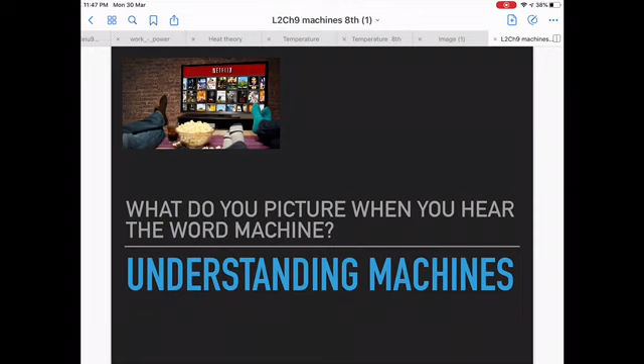I hope you're not going crazy by now. Remember that we're almost done for this part of the week, and then we'll start with our vacation mode. That will be super cool. You can watch documentaries on Netflix, stay with your family, play board games, chat with your friends, and a lot of stuff you can do. I know some of you really want to leave, but don't forget, stay at home and stay tuned.

Okay guys, I'm really joking a little bit with my class because I want you to smile. I want you to enjoy this time that you'll be watching my video, and I hope if you have doubts, just let me know. I'm really missing you, and I hope you are missing me too, a little bit at least.

I'll continue. So remember before we were talking about work and power and how all machines came from that. Now we said that in order to have work done, we need distance to be involved, okay? So this is what I want to start with.

Now we will start talking about understanding machines. I won't ask you what do you picture when you hear the word machine, because I know no one will answer since we're not online. So let's go to the next slide.

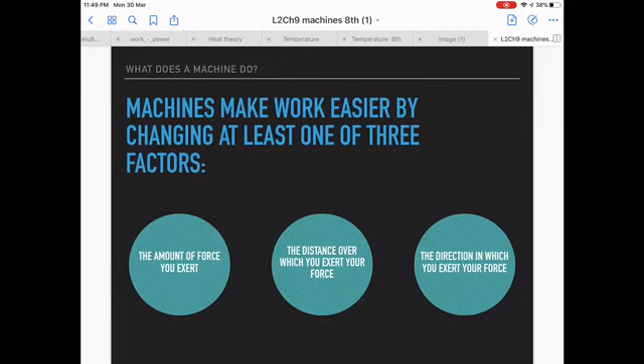I don't want you to be fooled with all of this information. You do not need to learn anything by heart, because right now I want you to have the theory about simple machines, understand them, understand some concepts, and then when we come back after vacation, we'll start with the problems, okay? Let's have it clear that machines help us do work in an easier way.

They can help us through three different factors: the amount of force you will exert, which will be less; the distance over which you exert your force, we'll see some examples later; and the direction in which you exert your force. If you apply your force pulling, the object will be pushed, or the other way around.

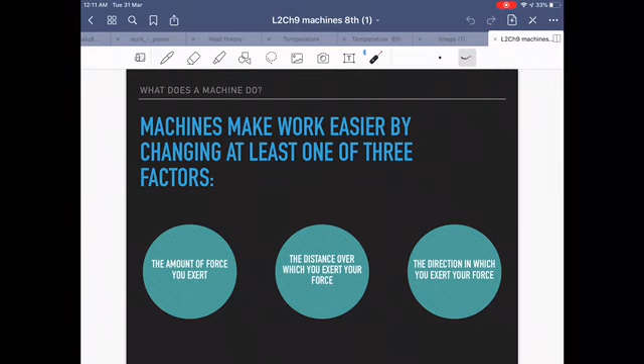Now we have two concepts here called input and output force. You already did these key terms before, and these two words are important. In order for a machine to work, simple machine or compound machine, it needs a force to be applied on it, so work can be done.

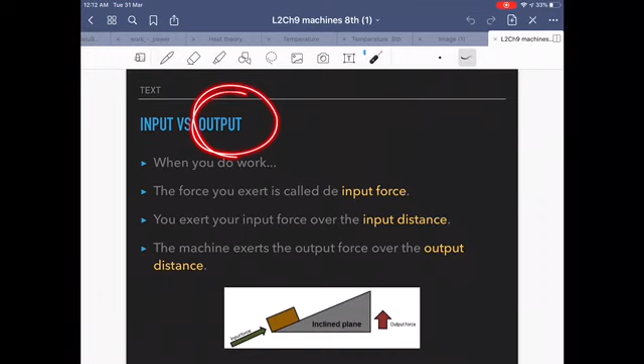The input force, for example, will be the force that is applied into the machine, the one that you as a person or another machine will insert or apply to the simple machine. And the output has to do with the outcome force: what it makes it like, the distance covered at the end, or the force covered at the end, etc.

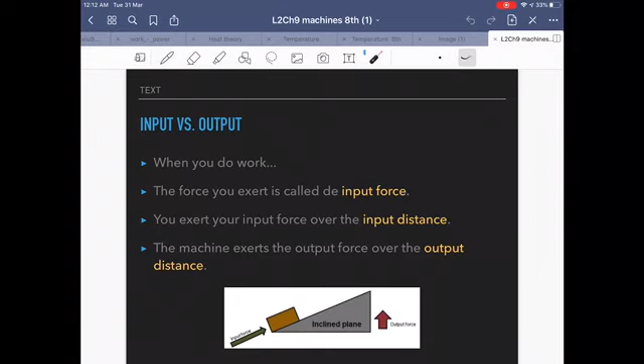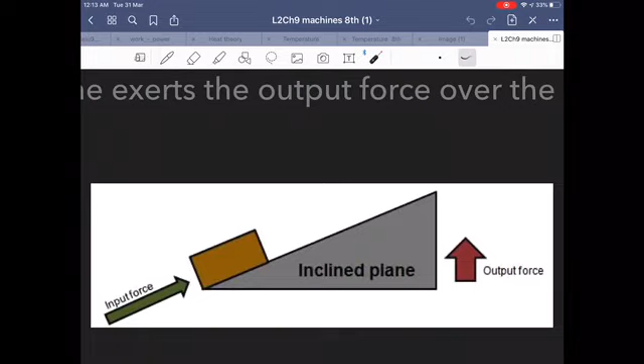Here I have a short example where you have an inclined plane. You already know more or less what an inclined plane is, if not we'll see it right now. The input force is applied right here, and the output force will be up here. That's more or less to understand this concept. As I said, you don't need to have it super clear, but understand it a little bit.

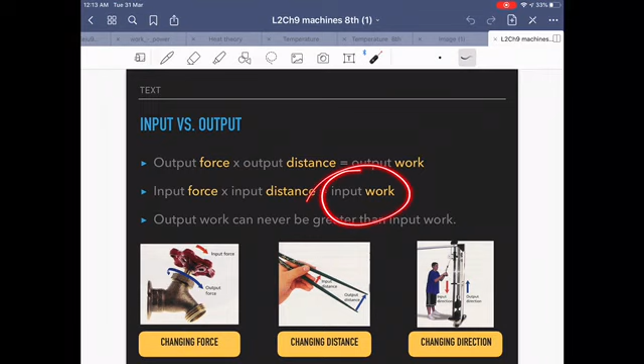We also have the input work and output work, and just as we know that work equals force times distance, right here the same applies. The output work equals the output distance times the output force, and the input work equals input force times input distance. Stuff that's kind of obvious.

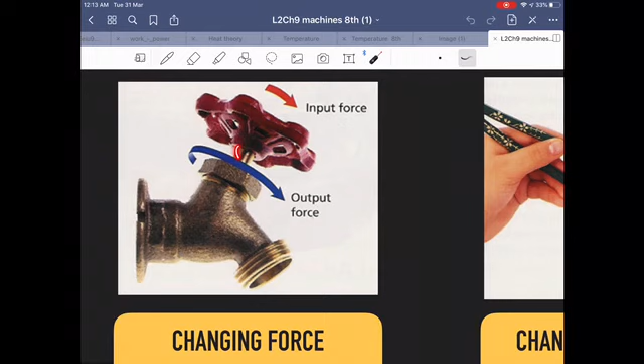Now the three factors I was talking about before, for example changing the force in this one: this small pivot right here, if you would use your two fingers to move it, it would be super hard. That's why they have this thing here to make it turn and make the force increase. This is the example of the first factor.

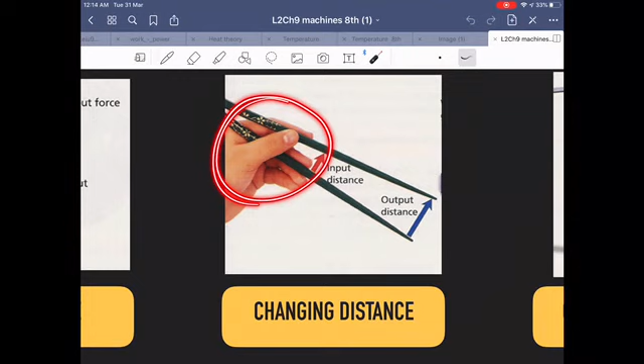The other factor would be the chopsticks and changing the distance. For example, in this part right here you're applying the force, and this part right here you're taking, in this case, the sushi, or the rice.

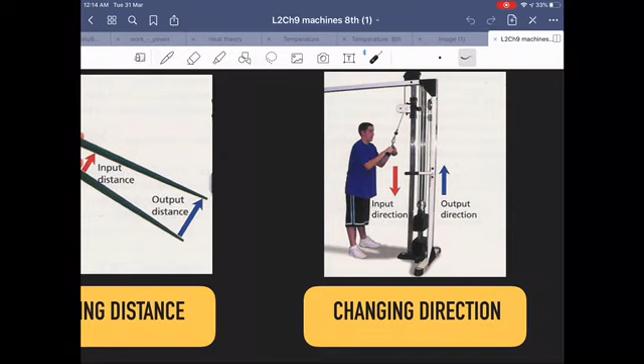Now let's move to what mechanical advantage is.

This is a very important concept that we need to know. Mechanical advantage is the number of times a simple machine helps you to do work in an easier way. Each simple machine will have its own formula, but I won't talk about that right now. It's the ratio, or the number of times, as I said.

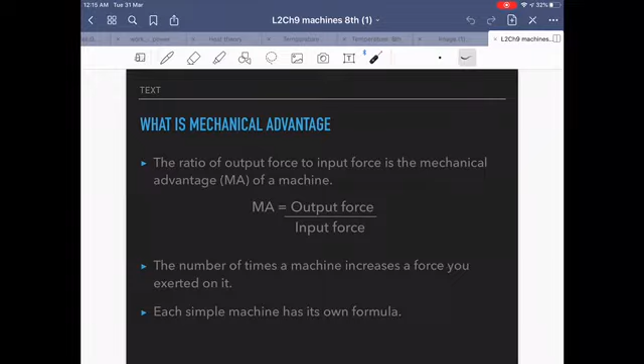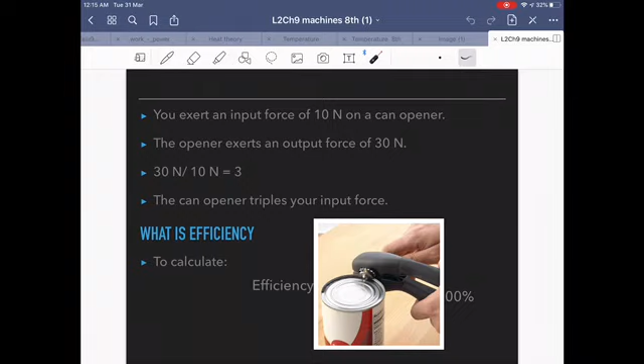I'll give you a short example. You exert an input force of 10 newtons to a can opener, and the opener exerts an output force of 30 newtons. Can you imagine applying a small amount of force, and the outcome is a bigger force? So you have 30 newtons as output, and 10 newtons that you applied.

So this is helping you 3 times. The mechanical advantage is helping you 3 times. It's like having 3 of you, like 1 Miss Pamela, 2 Miss Pamelas, 3 Miss Pamelas moving it with that force.

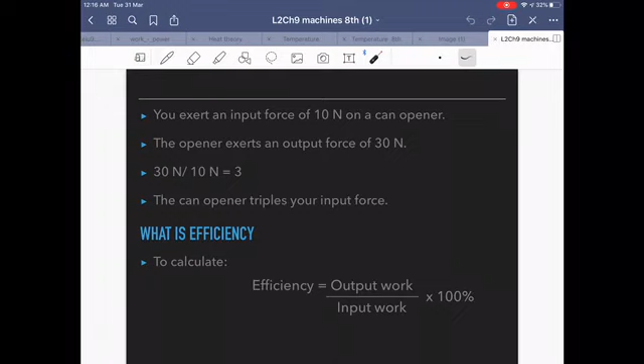And efficiency is dividing the output work by the input work and multiplying it times 100. We won't do problems of efficiency right now. That's for machines, and the most basic devices for making work easier are called simple machines.

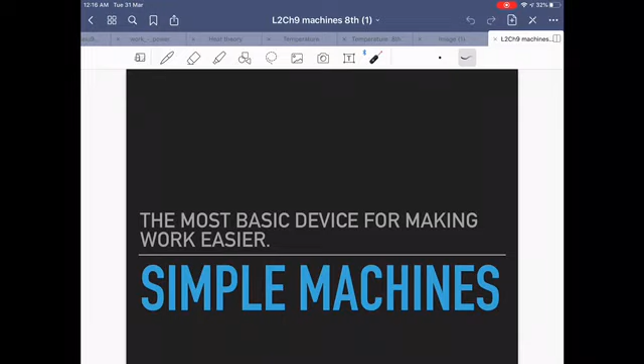By now you have heard the simple machines rap, right? I hope you liked it. It's kind of sticky, that song. I loved it, and I hope you remember it sometime. Sorry, my microphone fell.

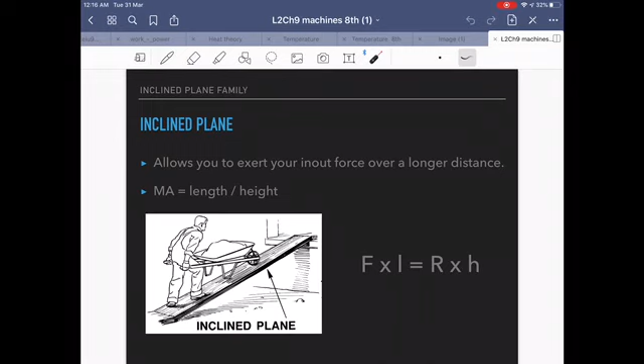Now let's start with the inclined plane. The inclined plane helps you move over a longer distance depending on how inclined it is. Please stop this video and watch the inclined plane video in the instructions of this classwork.

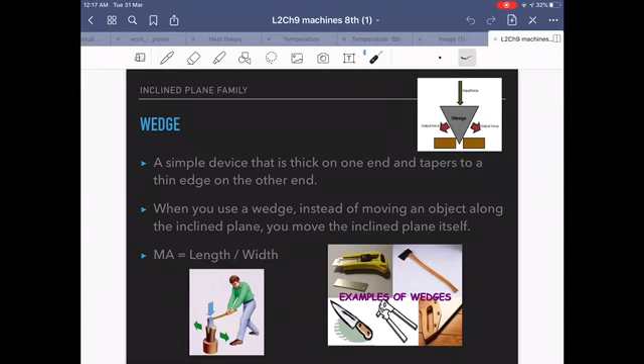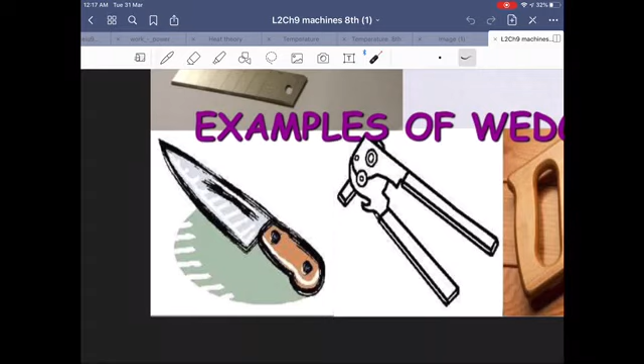Now let's talk about the wedge. A wedge is a simple machine that is thick at one end and thin at the other. If it's thinner, it has more mechanical advantage—it helps you more. For example, think of knives. Which knife helps you more when chopping a lemon: a butter knife, or a really, really thin knife?

Please stop this video and watch the correct video assigned on the classwork.

And now let's talk about the screw. The screw is an inclined plane wrapped around a cylinder.

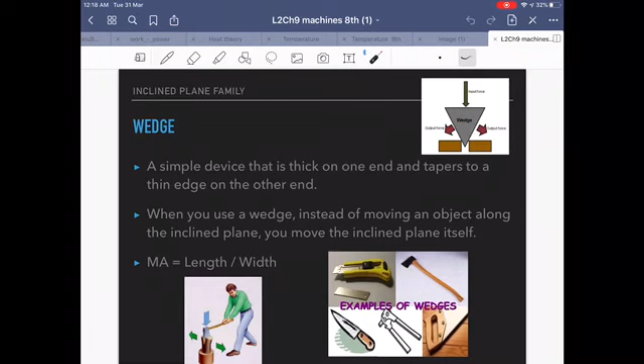I forgot to mention that there are 2 members in the inclined plane family: the screw, because it's an inclined plane wrapped on a cylinder, and the wedge, which is a small inclined plane that you can move with your hands. A big inclined plane, obviously, you can't move unless you have another machine to move it.

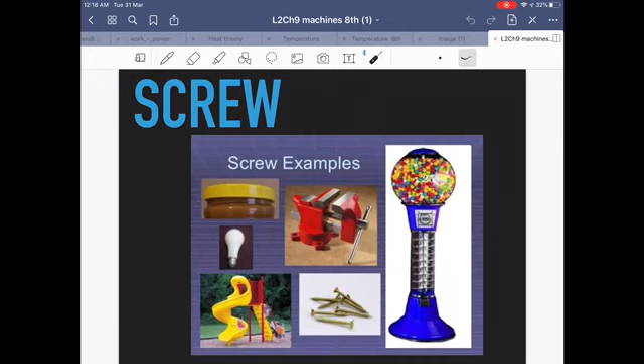Please stop this video and watch the screw video. Here I added some examples of screws. I hope you understand them better.

And then we'll start with levers. Please stop this video again and watch the video.

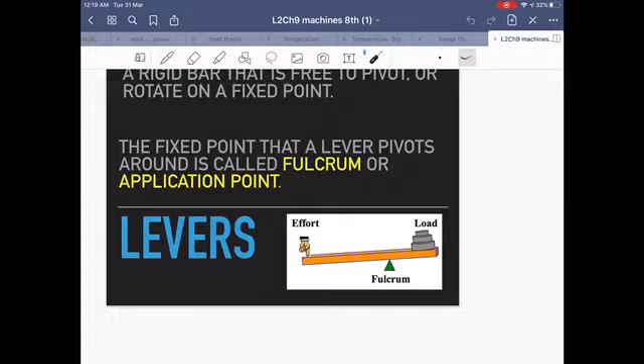Now about levers, guys. There are 3 classes of levers. What do I mean by this? The fulcrum, or application point, which you saw in the video, is where the lever pivots. And we have 3 classes.

In one class, the fulcrum is in the middle. In another, the load or the object you want to move is in the middle. And in the other, the force is in the middle.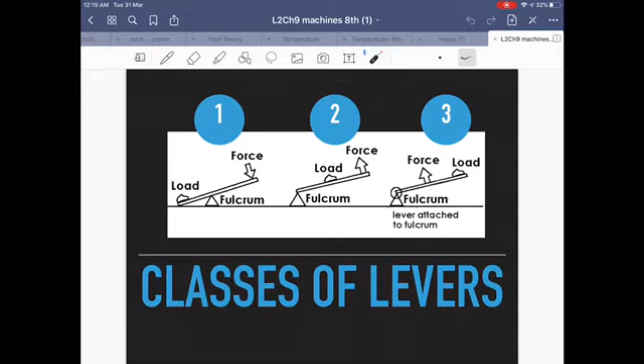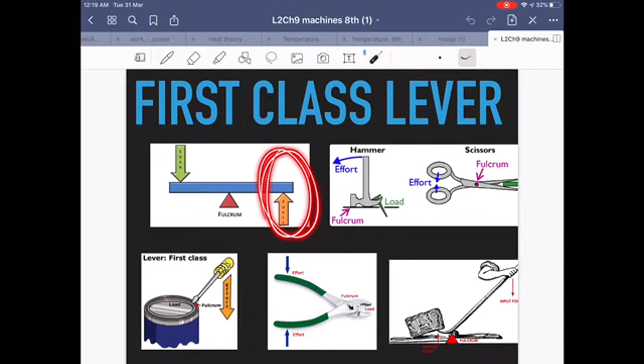Right now you do not need to learn them, but I want to show you the difference. The first class lever is the one where the fulcrum is in the middle: the force is on one end, and the load or object you want to move is on the other end. For example, let's observe this one.

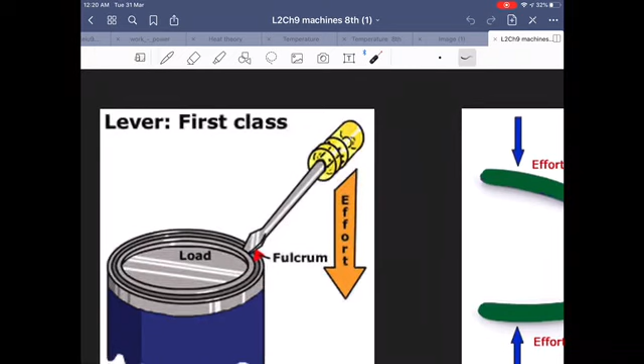Sometimes at home you've seen that you want to open a paint can with a screwdriver.

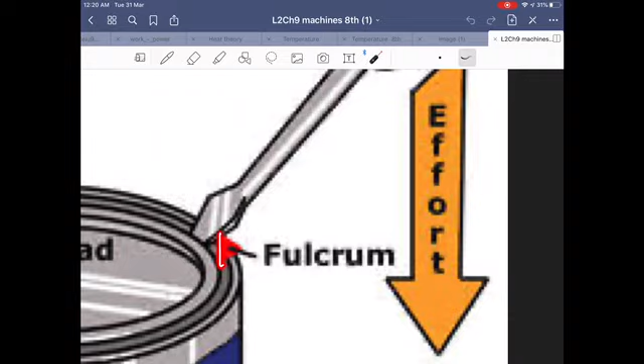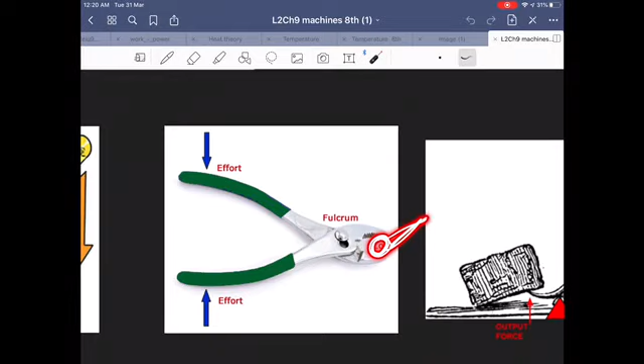From here to here is the resistance, because it's the lid, what you want to move. Then you have your application point or the fulcrum here, and the force is applied right here. If you observe these pliers, the object that you want to move, for example a screw, would be right here. The fulcrum is right here, and the force is applied right here.

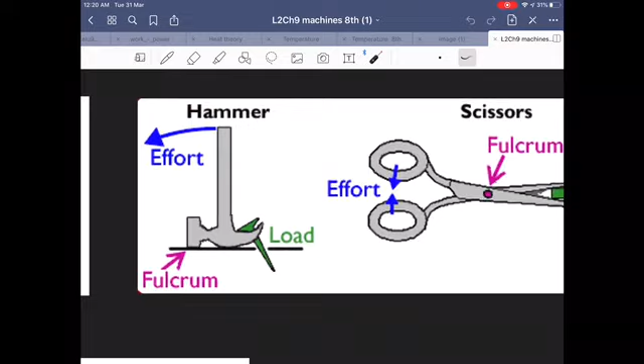The same in this one, which can also help you understand it: a shovel, pulling out a nail with a hammer, and the scissors. Here is, for example, the paper, the fulcrum, and the force applied. This would be the first class lever.

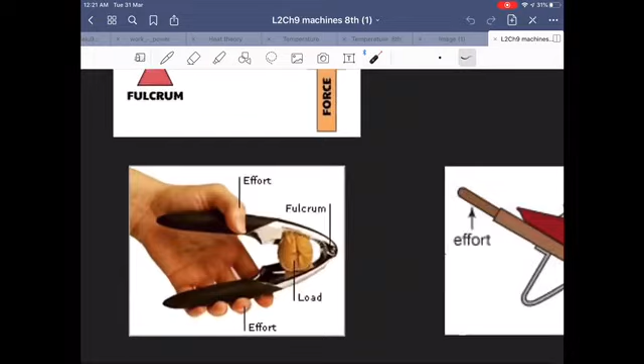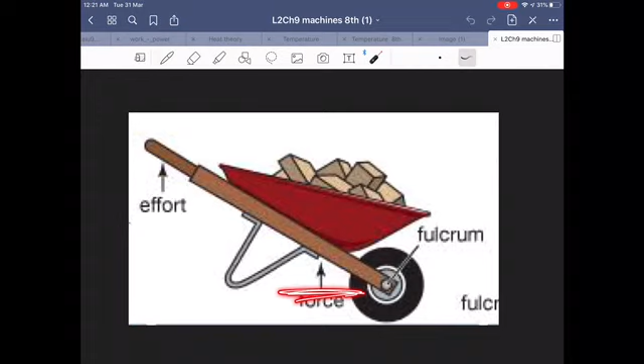Then we have the second class lever, where the resistance or the object that you want to move is in the middle. We have a nutcracker here: application point or fulcrum, the object you want to move which is the load, and the force applied right here. Or in this one with the wheelbarrow, the force is applied right here, the fulcrum or application point is right here. And I don't know why it says force here, but it's not force—here would be the load or resistance.

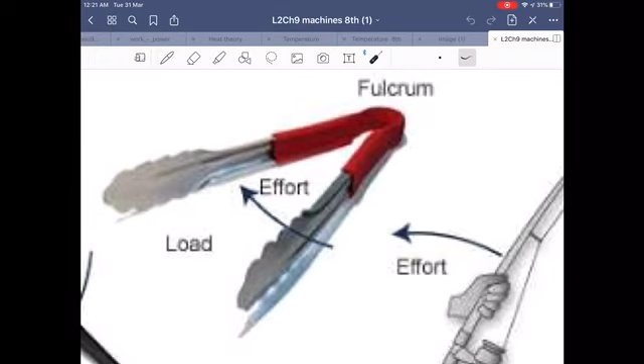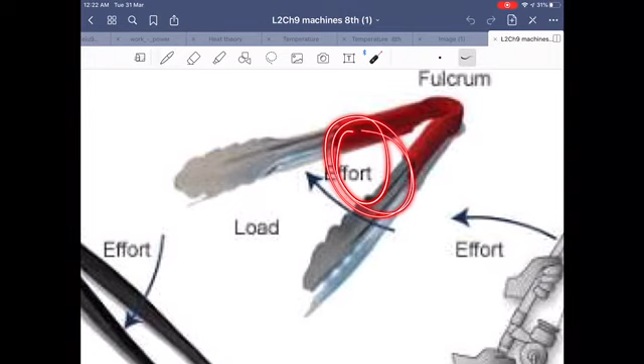Then we have the third class lever, where the force is in the middle. We have a broom, we have some tweezers, for example the ones for bread or carne asada. Here you have your bread or carne asada, as I said. The object that you want to move, the force is right here, and the fulcrum is right here. And you can now guess how this one works from here to here, this one and this one.

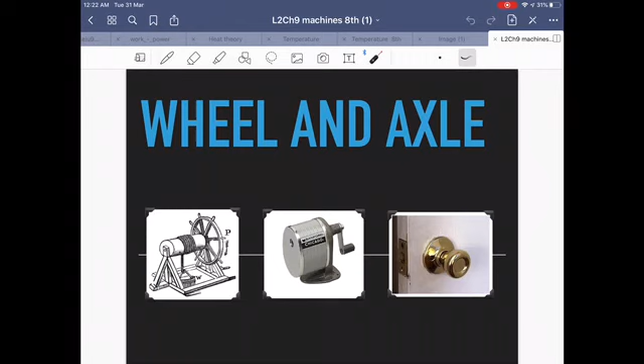And then we have wheel and axle—please watch the corresponding video. Then we have pulleys—also watch the corresponding video.

For pulleys, you don't know, but I was super excited because Professor Israel, with the carpenters at school, built me some pulleys so I could teach you how they work, how mechanical advantage works. It's the first time I ever had something made for this lesson, and I couldn't use it. I really hope next year we can use it, or when we come back.

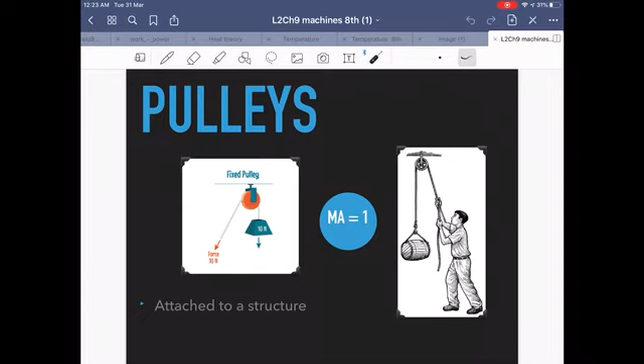We have a fixed pulley. The fixed pulley is, in Spanish, fijo—it's not moving. So this one is right here, and it's just like a piñata. The mechanical advantage of this one is 1, so it is helping you only once.

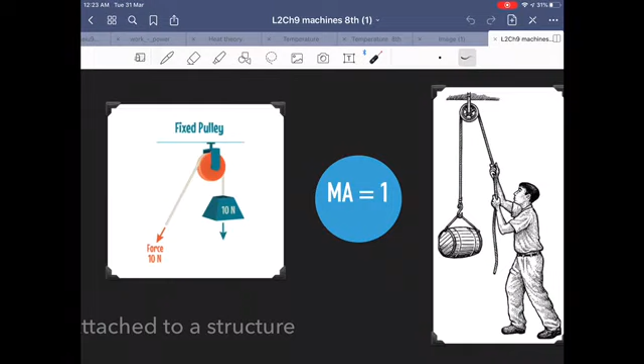But teacher, how come it's a simple machine and it's helping me if it's only helping me one time, not two or three like the can opener? Well, because for example, imagine lifting a barrel instead of pushing it upward—it's easier to pull down because you apply all of your force that comes with your body downward, and it's easier.

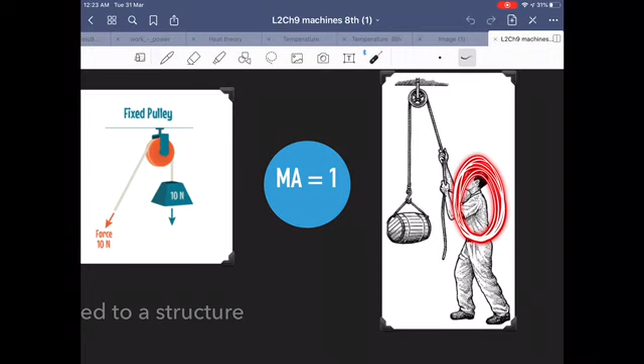That's why. Then we have a movable pulley, and this one has a mechanical advantage of 2. We'll see the problems later on. An excellent example of this would be a zip line.

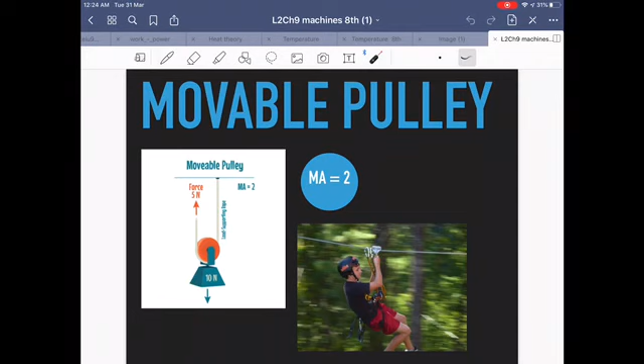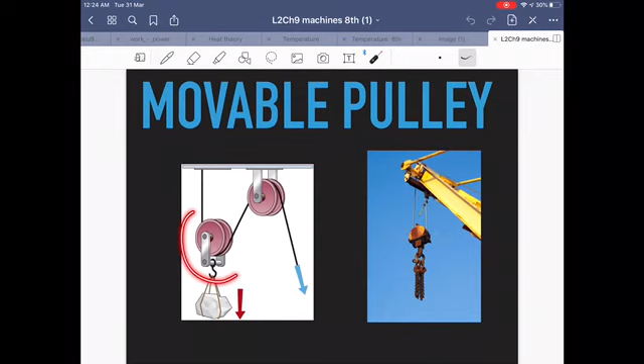And then we have the movable pulley—we're still on the movable pulley, I'm sorry. This is another example of the movable pulley. Here we have a crane. This one would be the movable pulley, and it's with a fixed pulley, but you count this one right here. And then we have the block and tackle.